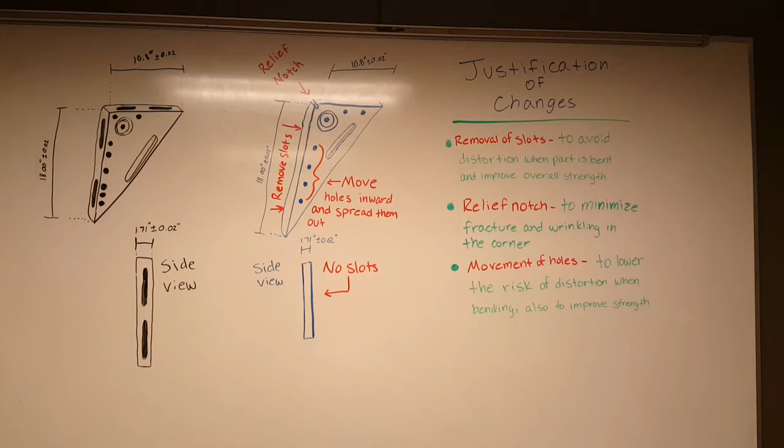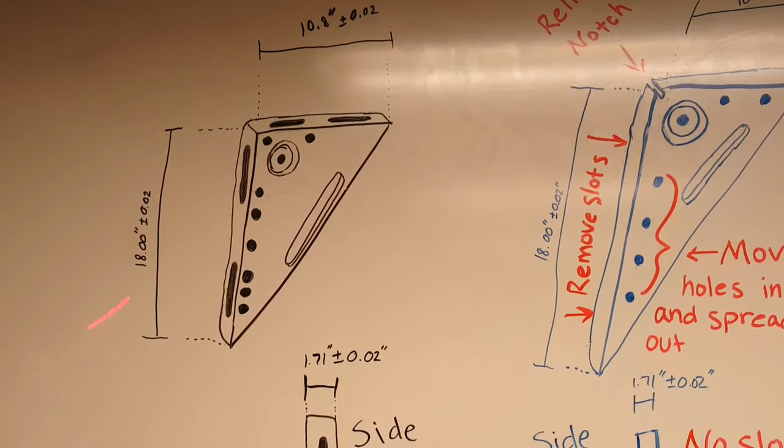This is Team Rocket. We are a group of manufacturing engineers and have been tasked with redesigning this bracket. The only specifications given to us have been the 3 overall part dimensions and to accommodate ease of manufacturing for a sheet metal worker. After brainstorming, we have decided to make the following design changes.

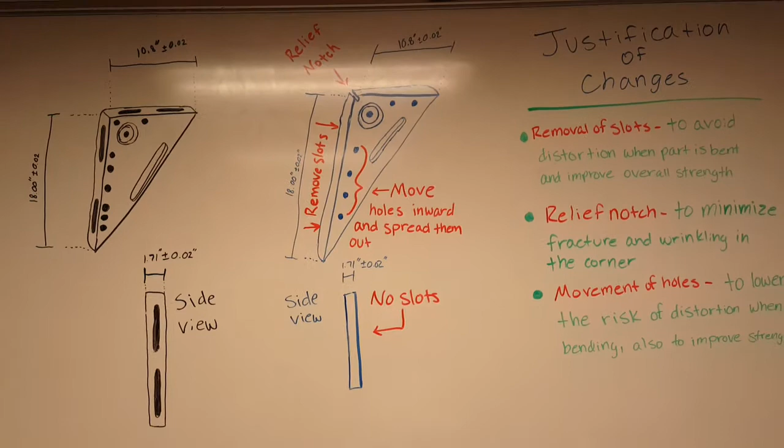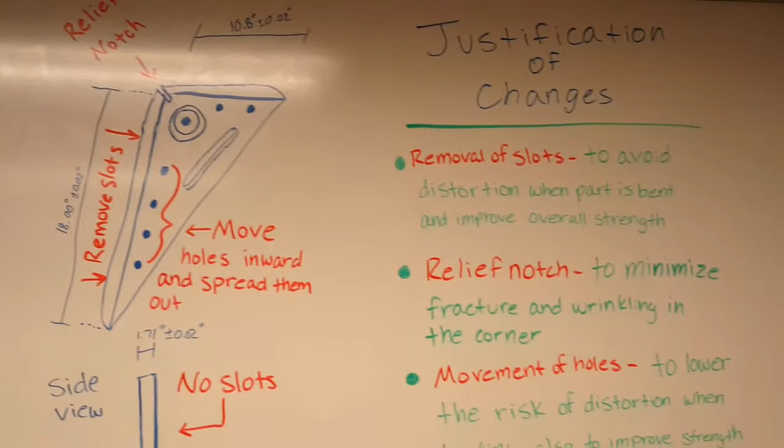First change we have made is cutting a relief notch where the bend comes to a corner. The relief notch is cut to minimize fracture and wrinkling in the corner.

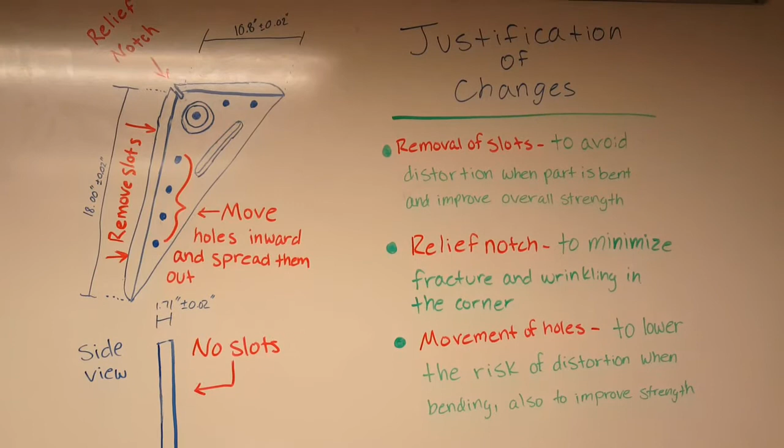Second improvement and change we have made is removing the slots that are on the sides. We remove these to avoid distortion when the part is bent and to improve overall strength.

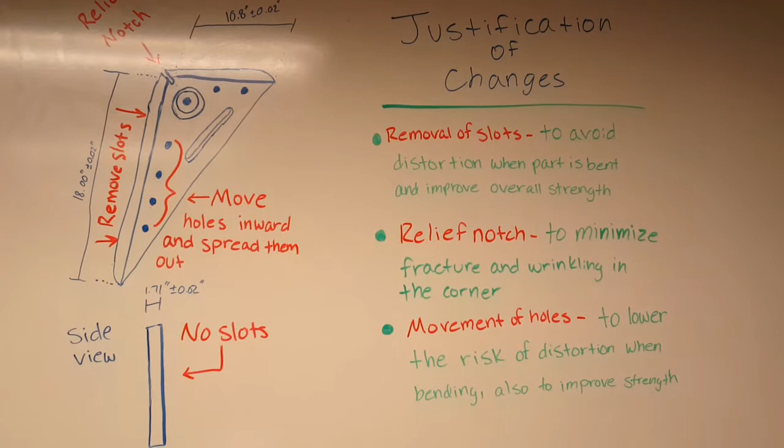The third change we have made is to move the holes inward and spread them out. This is to lower the risk of distortion when bending and also to improve the strength of the bracket.

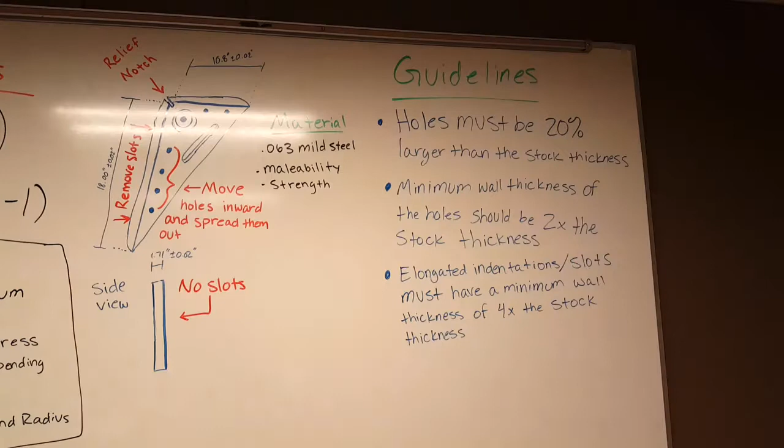Based off the overall size of the bracket, we are assuming that this bracket will experience substantially large loads. Given this, we have decided to use .063 mild steel due to its malleability and strength.

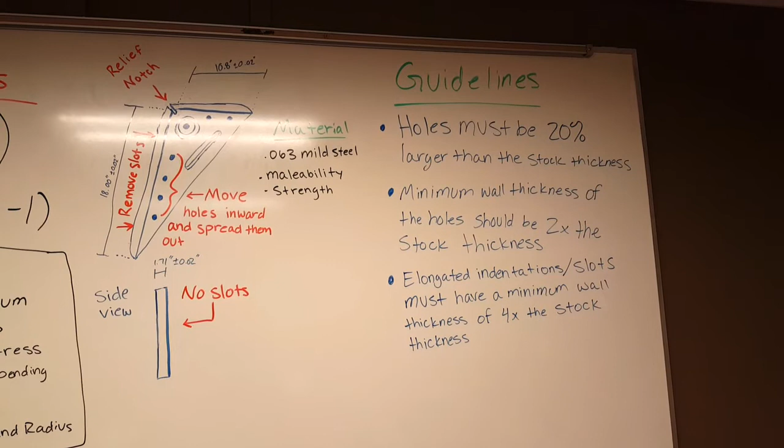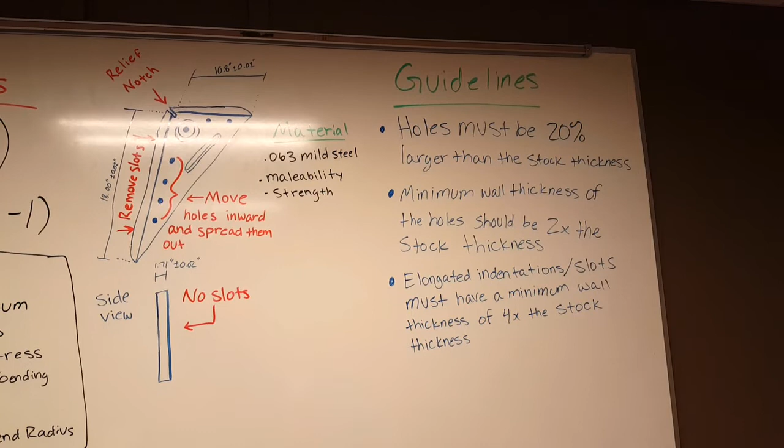Concerning the features of our bracket, we have followed 3 main guidelines. These include making holes 20% larger than the material thickness, ensuring holes are separated by considerably more than 2 times the metal thickness, and spacing elongated indentations or slots more than 4 times the steel thickness.

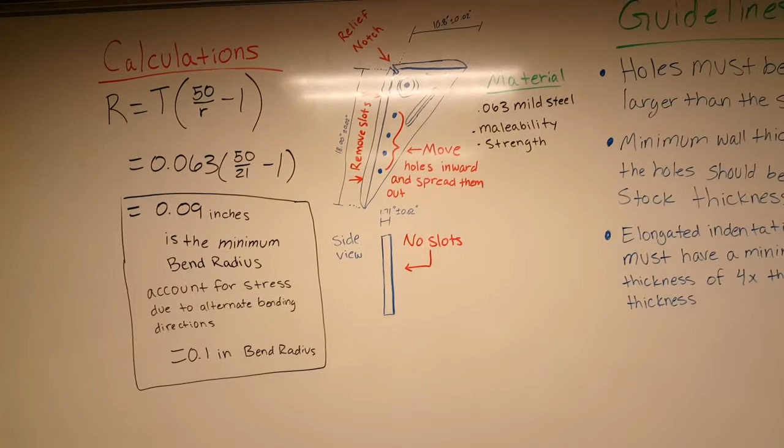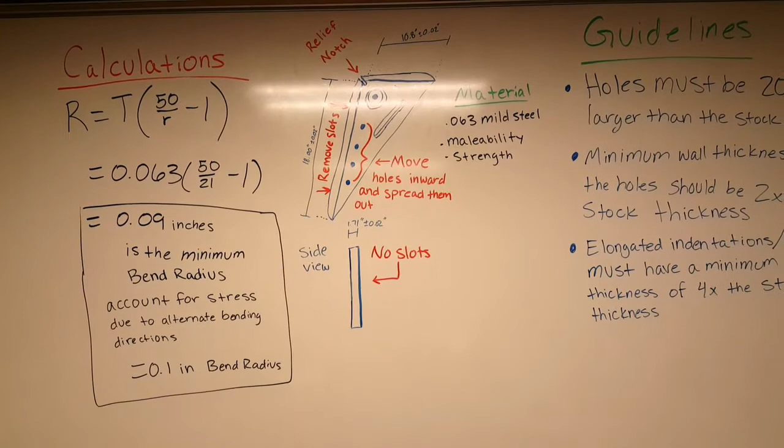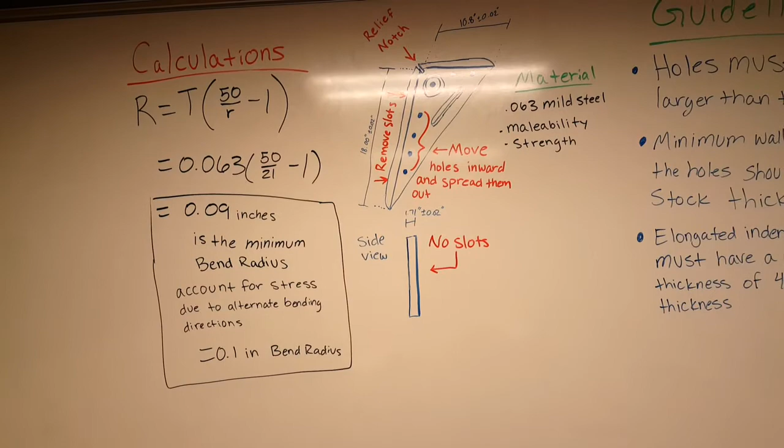Based off of these considerations, we've calculated that the radius of the material along the bend must be 0.09 inches. We also accounted for the stress due to bending in alternate directions, that's parallel to the rolling direction and perpendicular, and so we accounted for a little bit more. We determined that the final bend radius would be about 1/10 of an inch.

Putting all these factors into play, we decided among these 5 processes for producing our changed bracket design. First, we will pierce the alignment holes. Then we will shear the rough shape of the product into the triangular shape from the original plate of steel.

Then we will form the indentation in the middle of it. We will bend the edges down, and then after all of that is said and done, we come up with this finished product.

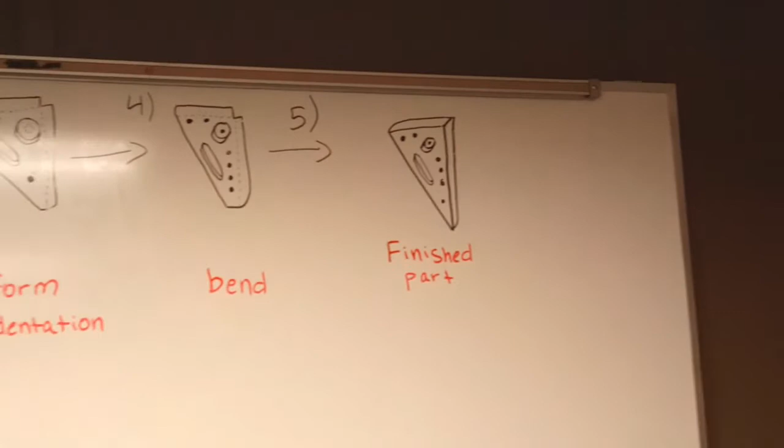And we chose not to anneal to cut down on costs and to cut down on time, because the steel we have chosen is already ductile enough, so we don't need to make it more ductile.